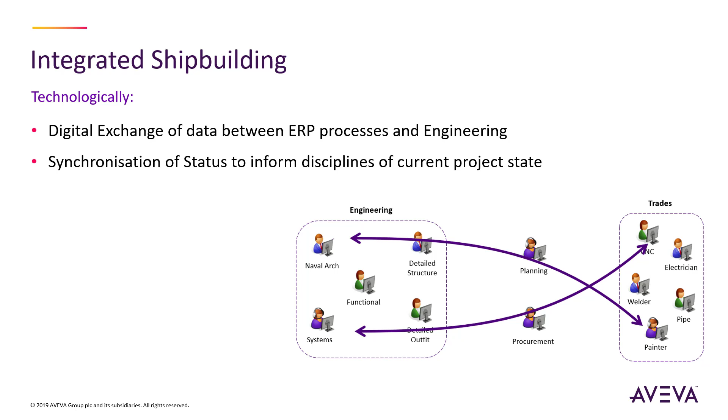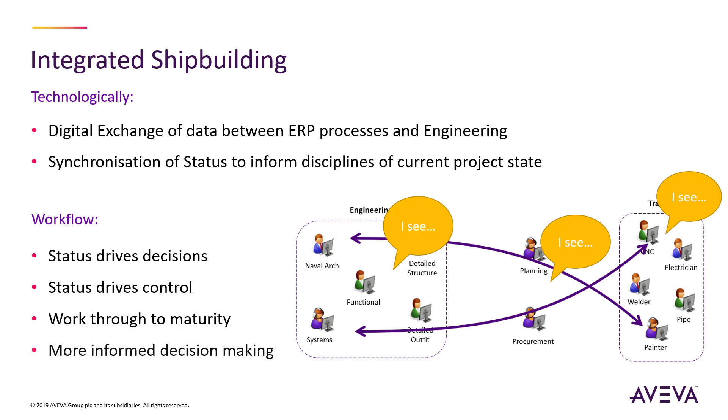As a software solution, integrated shipbuilding supports the process by supporting the digital exchange of project data between the ERP processes and engineering. It synchronizes status information so that different disciplines are informed of the current state of the project. Consequently, status can be used to drive the decision-making process. Status can be used to control the path of the project. This focuses the project to work through towards maturity by the fact that everyone is now more informed in the decision-making process.

Let's now turn to AVEVA ERM to focus on the specific activities this solution supports. AVEVA ERM focuses on all of the traditional ERP activities from project management, planning, production control, management of materials, purchasing, and stores management.

It has four main focuses: catalogue management, where common materials and part specifications are managed; materials management, which procures all that is needed and tracks delivery through to the warehouse; planning organises the activities, collects materials from the warehouse and sets up jobs and processes to track the progress of the project; production allocates and executes jobs, reporting back up to the planning process. When you get into the detail, the solution is quite complex.

I had my first proper introduction to ERM back in 2015, where a team of colleagues were introducing the solution to a shipyard that I was delivering training at. It was a big conference meeting over 5 days.

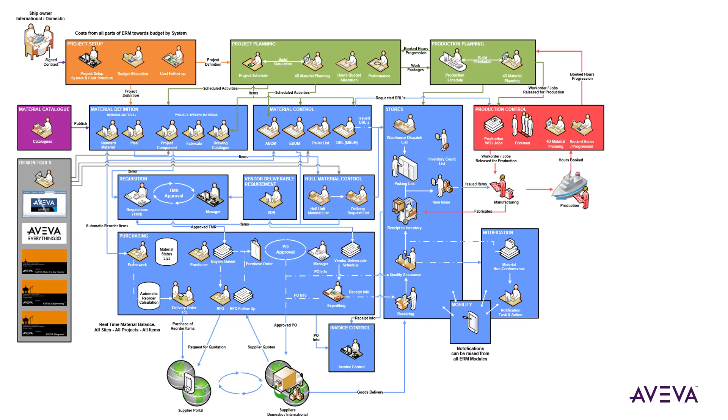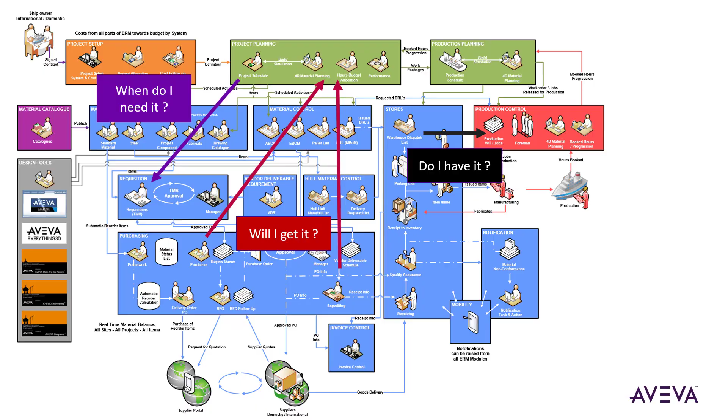There is some deep content here, but when you get down to the individual roles in the process, it's not too complicated. It's all about, when do I need it? When will I get it? Or do I already have it? So rather than spend 5 days, we've distilled the whole process down to 25 minutes. We're going to focus on a typical pipe engineering and fabrication scenario and track it through from design into installation.

We'll start by seeing the engineering process, where the designer will first start preparing the functional design information. With assistance from the software validation process, they'll introduce the information needed for fabrication. Then they'll produce the manufacturing outputs and communicate the bill of materials information through AVEVA ERM to the materials management team.

The material management team will review this information and accept it into the planned activity. Then they'll requisition the material needed to deliver the activity. This will pass the initiative over to Procurement, who will, in our example, prepare an RFQ. This will subsequently be reviewed by a supplier who will return a quote.

Procurement will follow up on this, preparing a purchase order and preparing the delivery tracking information. This entire process will happen digitally. Following this, we'll hand over to detailed planning, who will generate the individual jobs required to execute the activity, requisition materials and parts from the store before issuing the detailed plan.

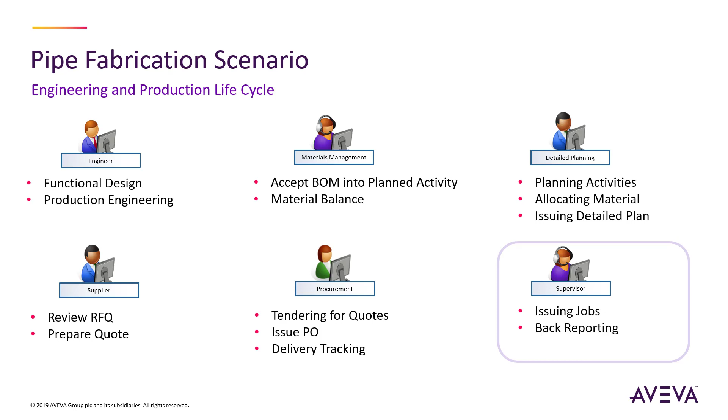Finally, we'll see the role of the supervisor issuing and tracking the individual jobs and how this information is rolled up to the detailed plan and to the project plan.

To note before we begin, the videos together make up 25 minutes of content. The original content my colleagues recorded lasted 45 minutes, so like the Apple adverts, these sequences have been shortened for clarity. But it's worth pointing out the activities you'll see will probably take place over days, weeks and months, so in this respect the shortening is keeping things to the point and interesting.

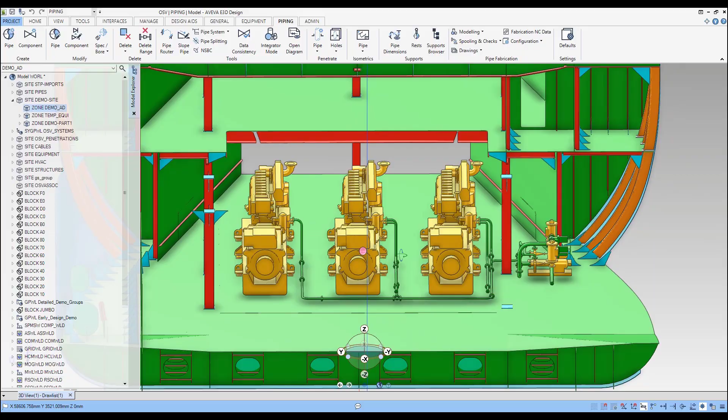So we'll start with the engineer. They'll be designing a pipe, validating the engineering, subsequently producing the production information, and then issuing the bill of materials. Let's begin in the 3D environment, in the engine room. We have displayed here a machinery space with 3 generators and the lube oil system to the right.

We're going to be connecting the system up to the genset on the far left and to the pipe branches already placed for the other gensets in between. We'll start by creating a pipe, naming it, and selecting a specification that will dictate the components and standards we're allowed to use. Then we'll define the intended bore size and some of the operating characteristics.

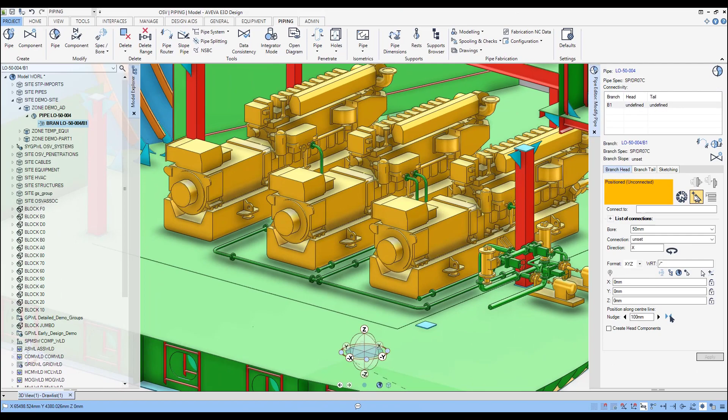Next we'll establish the start and end of the pipe, termed the head and tail. This involves interactively selecting the intelligent nozzles to define an indicative pipe trace presented as a straight, dotted line. We'll be connecting the filter to the far genset.

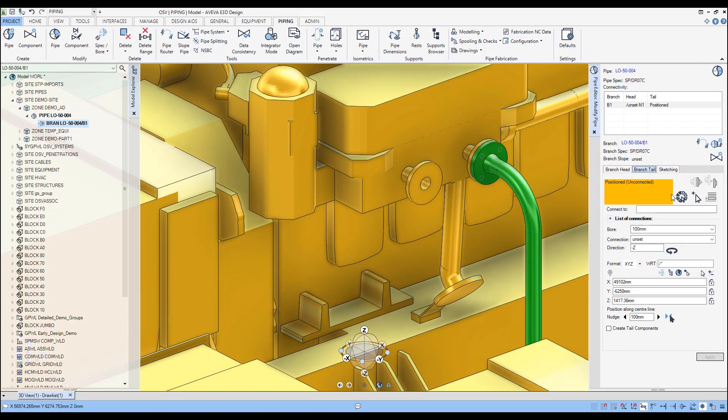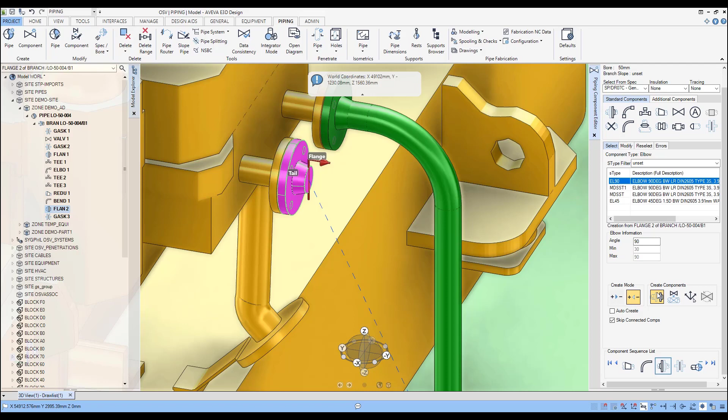Next, using the menu, we'll add and position components. This is one of the many ways of building up a pipe. The position and orientation of pipe components are constrained to behave as a pipe would in the real world, as you'd expect. This simplifies the designer's actions during the preparation of this information.

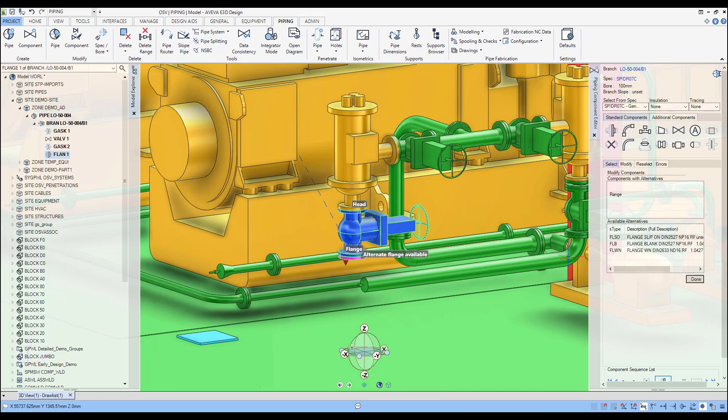Swapping to the other end of the pipe, we'll add a gate valve and place it in a clash-free position with respect to operation and maintenance considerations. The software will ask us to select additional components, in this case the subsequent flange specification required following the valve in the sequence.

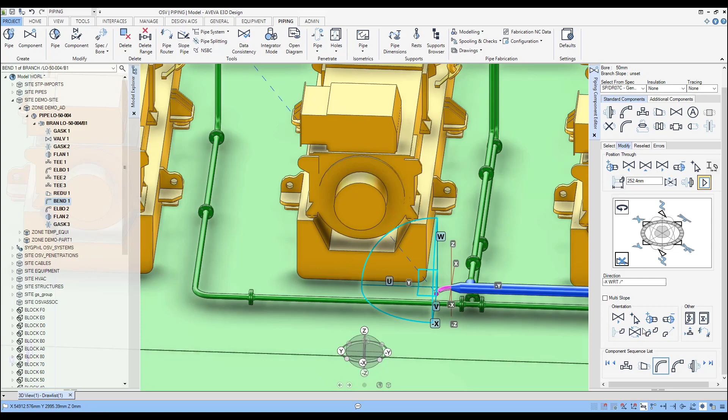We'll now move on to the completion of the pipe to allow us to focus on consistency and fabrication. Using the alignment tools, we'll place the final set of bends and elbows to connect the pipe from head to tail. Note that the designer has never touched the tube itself; it's implied between the piping components, looking after itself.

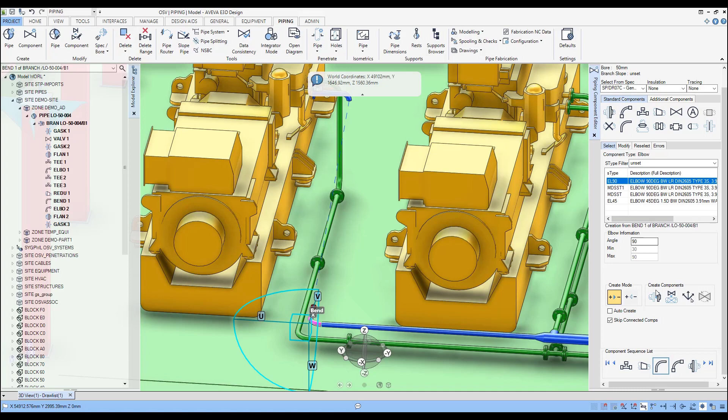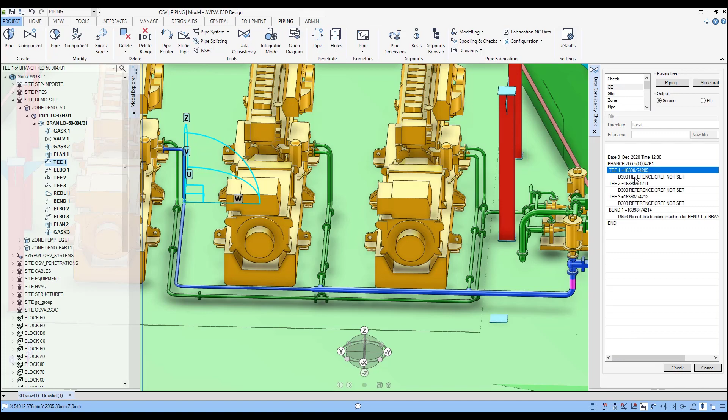With the pipe complete, we'll now run automatic consistency checks to validate if the design conforms to the level of information required to proceed to fabrication. The data consistency check is a first level of maturity after design. The data consistency check in this case reveals 4 violations, 3 incomplete connection references, and a bend that falls outside the capability of the bending machines.

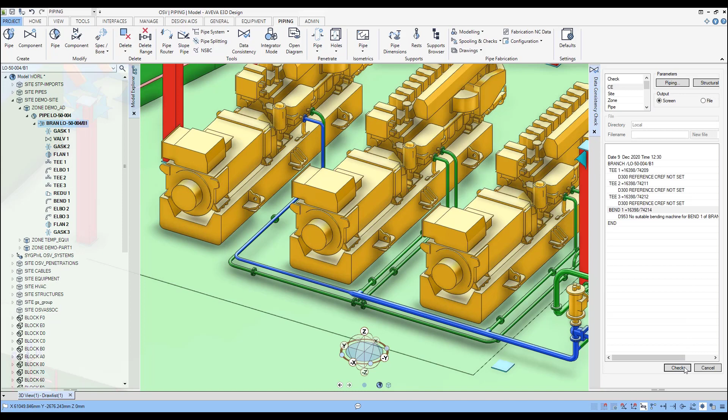The designer will now update the pipe to conform to the standards led by the output of the consistency check. We'll run a final check to confirm an acceptable design. Next, we'll perform a fabrication check. This will confirm that a pipe can be built within the facilities, processes and standards used in our production process.

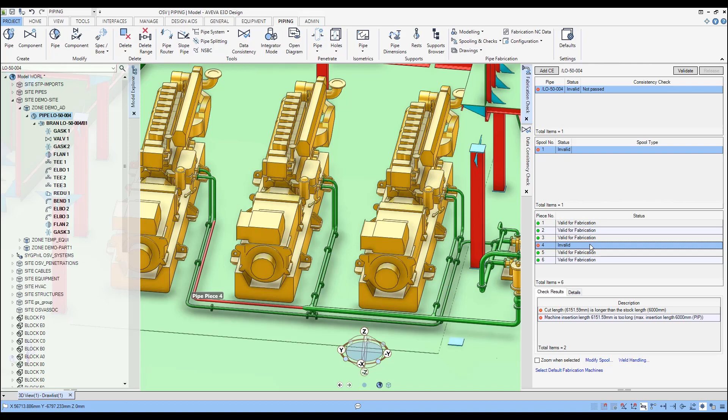Fabrication check highlights an invalid section with 2 violations where the requested tubing is both longer than the stock length and longer than the capability of the bending machine. Since the pipe has yet to be split into spools, this is the next logical step.

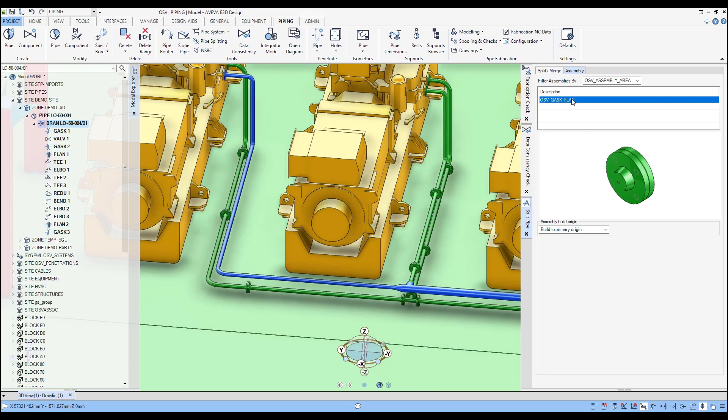The pipe splitting process is automated, determined by a number of rules. In this case, we will specify a minimum and maximum spool length. We will also need to select the specification for the splitting flanges. After selecting the portion of the pipes we want to affect, the additional pipe components required to define the spools are introduced into the sequence.

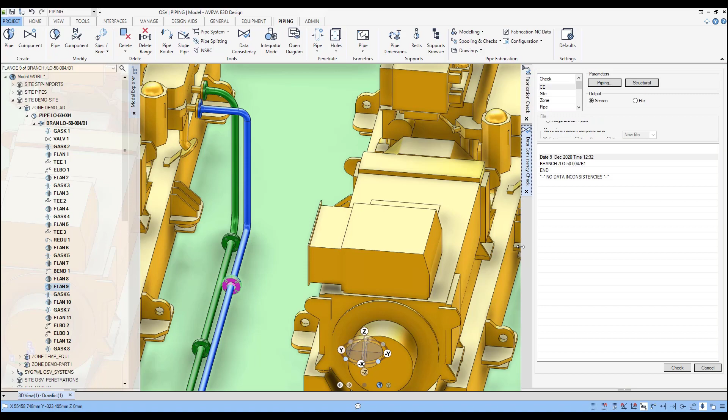The pipe will now pass the fabrication checks, which allows this data to be released for fabrication. This state will allow us to generate the associated drawings. We'll start with the individual spool sketches.

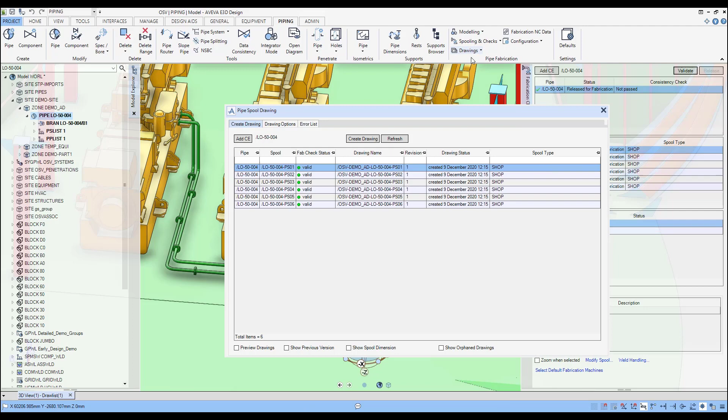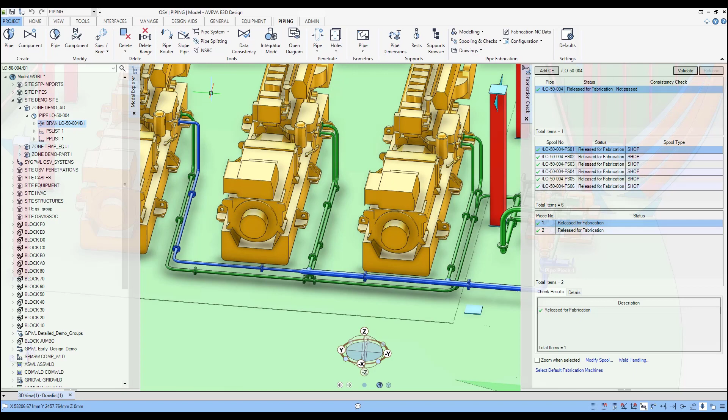Next, we'll generate the overall piping isometric. You'll note that the isometric contains parts and bolting lists retrieved from the catalogue. The designer never directly specifies this information, and this demonstrates yard standards being brought through into the production outputs with automatic consistency.

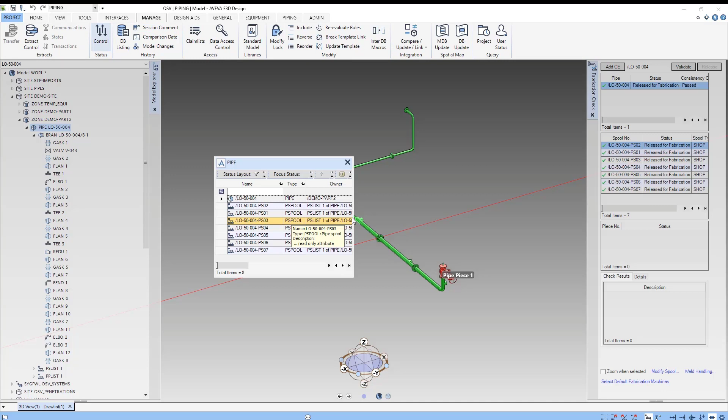At this stage, we've completed the engineering tasks and will hand over leadership to the planning, procurement and material management in ERM. To communicate these intentions, we'll raise the status on the pipe, which will mark it to allow us to publish the part list information to planning and procurement. This process may also introduce a lock on the pipe to prevent unauthorized modifications until the required change management workflow steps have been followed, but only if this is a desired implication of your maturity management strategy.

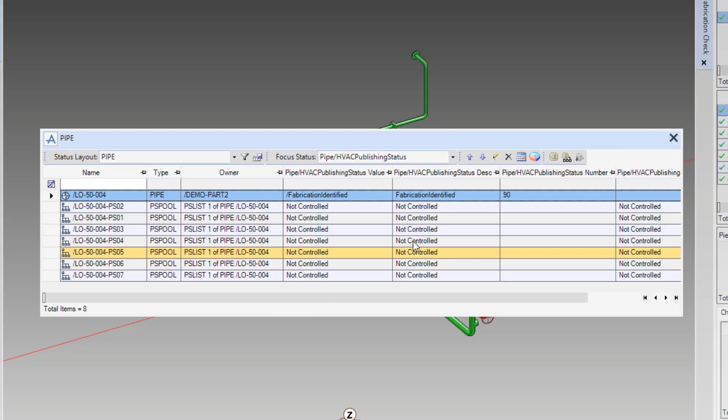Next, we'll publish the information that has changed state to ERM as we hand over to that stage of the process. No need to create paperwork, leave your chair, or even have a conversation.

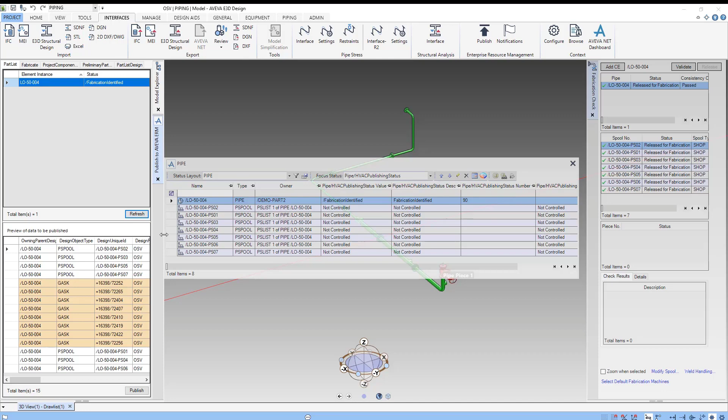So we saw the engineer designing the pipe. He followed up by validating the design using the data consistency and the fabrication checks. Once complete, he issued the manufacturing information in terms of the spool sketches and the isometrics. Following that, they issued the bill of material.

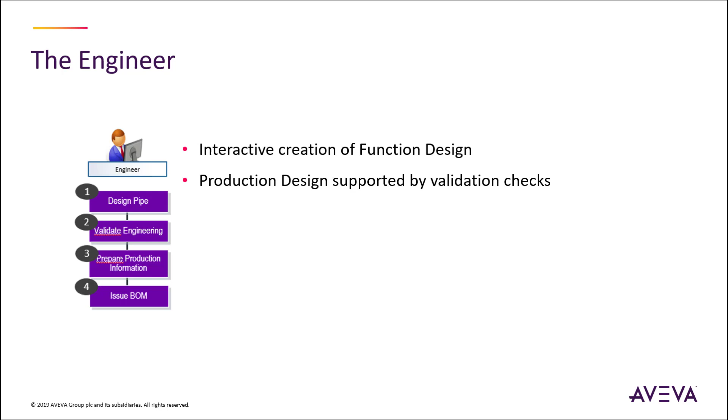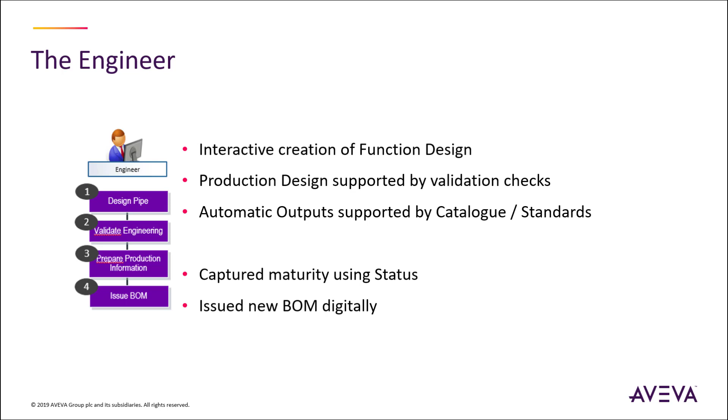One should note the interactive creation of the functional design content, how production design was supported by validation checks, and the automatic outputs supported by catalogue and standard information. We were able to capture maturity using status, and we issued the new bill of materials digitally.

We'll now move on to the project planning process. In handing over the bill of materials, the project planner will review the activity with respect to that information. They'll update the project plan, review the material balance, and request any material that's needed.

Now in ERM we can see we've received a part list, and this is allocated to an activity, Pipe 004 403 0101, which we'll shortly see in the project plan. In this state, the received part list is pending review and release into the plan. The part list contains all the items just issued by engineering.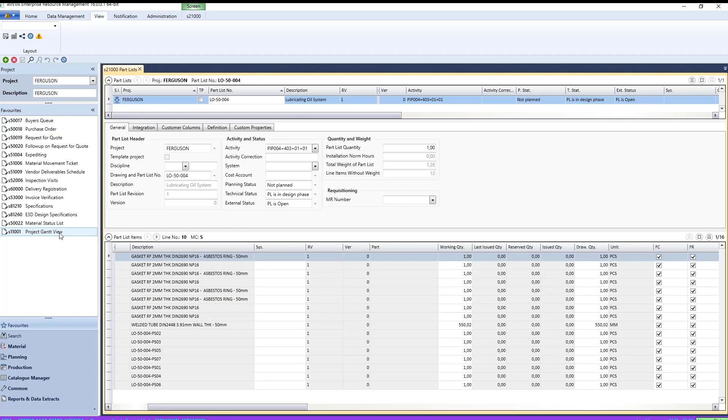These items will automatically inherit dates when they are required by virtue of their association with the activity.

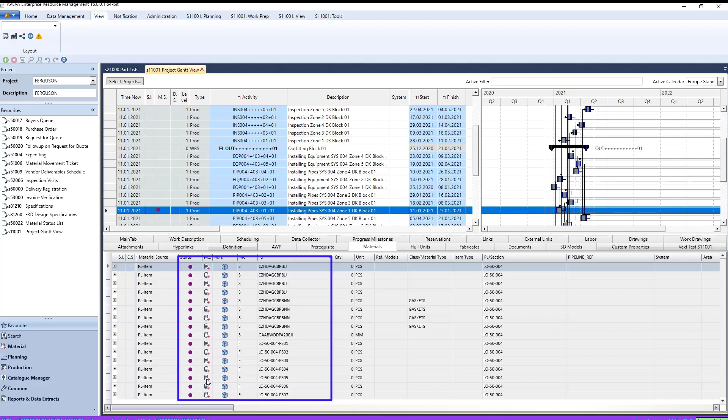In the project view, a Gantt chart will scroll through to the activity, and you'll note it's highlighted by a black dot in the material state column. Action is required. Selecting the activity, a black material status against each part in the material list indicates it's unavailable. Having checked the parts list, we'll now issue it into the planning process.

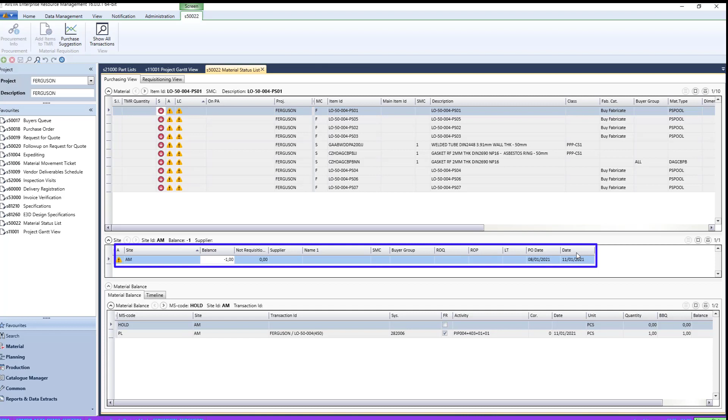Now taking a look at the material balance, we see here a selection of red arrows, indicating that there's no stock of any of the items in the parts list. The graphical timeline of material balance, which indicates inventory and utilization of resources in the project, is negative.

To address this, we'll turn this demand into a technical material request, a TMR, and issue it to Procurement to obtain the materials we need. The TMR is generated directly from the stock request. In addition, we can attach the associated engineering documents seen previously to support the business process as we go out to third-party suppliers.

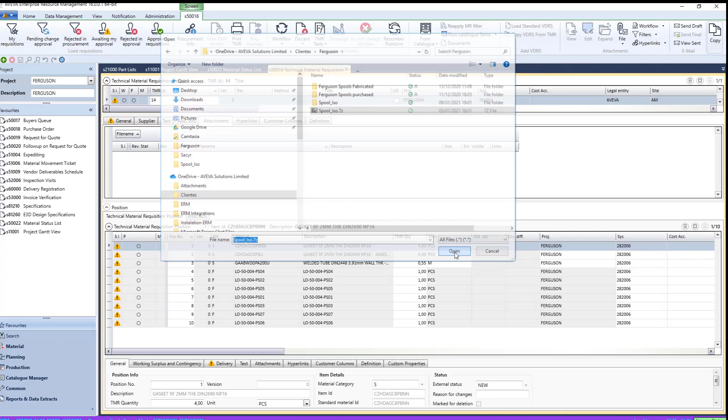Documents can be attached as a pack, zipped, or individually.

We'll give the TMR an identifying title, check and review the header, then issue for approval.

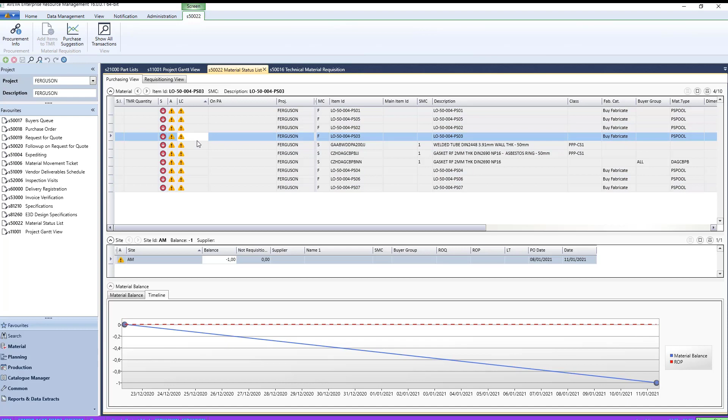So we saw there the role of the project planner once they received the bill of material information. They reviewed it, updated the project plan, and for any material that was outstanding, reviewed the material balance and issued a request for additional material.

It's interesting to note that these spools have been received as fabricates. We'll be issuing them to a third-party supplier. An alternative is that we could be generating these spools from fabrication using standard material. It's a very similar process that works in parallel to what we've been showing.

We'll now be looking at the procurement process. Based on the material request we just issued, Procurement will issue an RFQ, and they'll issue it into the Supplier Portal. The supplier then has the opportunity to review the RFQ and prepare a quote accordingly.

Back in Procurement, they can review the quotes, select which one they want to move forward with, issue a purchase order, and prepare the delivery receipt for any parts and materials coming into our warehouse.

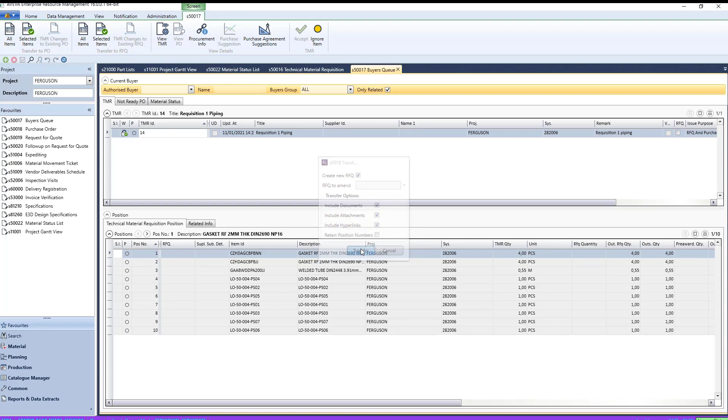The initiative now falls on Procurement to acquire the parts we've just requested. They'll find the TMR in an effective inbox, the buyer queue. We'll turn the TMR into an RFQ, which in this case we'll publish to the Supplier Portal.

All of the requirement dates are carried through based on the activity the parts were associated with. We can set the relevant dates over which the request is valid and any other characteristics.

Here we are selecting the suppliers we'd like to quote on this RFQ.

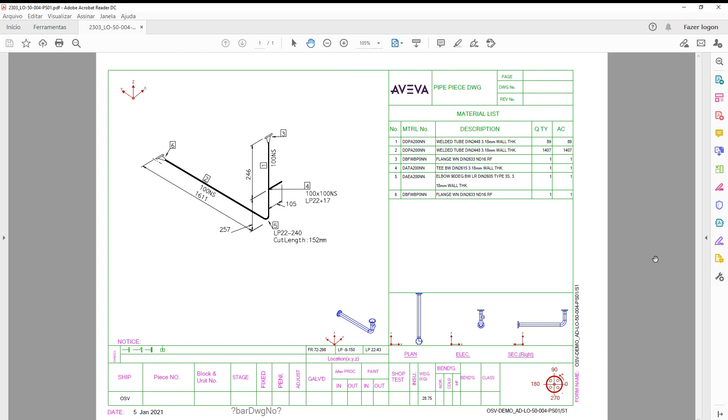Attachments added to the TMR are automatically carried through into the RFQ. Submitting the RFQ highlights the chain of approval. This workflow can be tailored for each organisation, with separate individuals holding responsibility to fully issue, for example, RFQs and purchase orders. You'll see that process happening several times in this session.

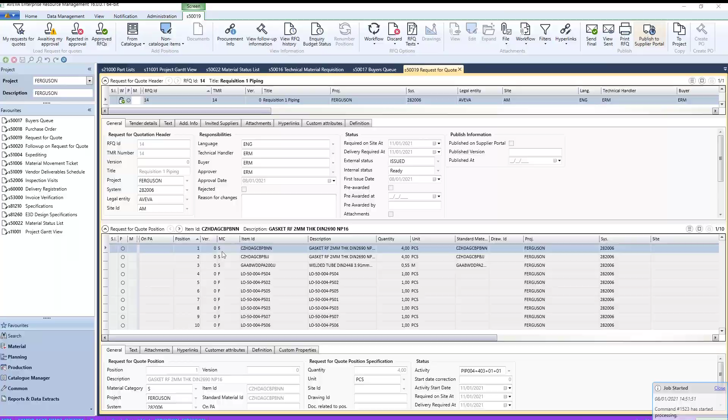Now we turn to an external view of this data. The Supplier Portal is where third parties can electronically respond to your RFQs, managing all the information exchanged in one place within a qualified workflow. The RFQ dashboard shows the state of all the RFQs, and we can see that we have one available to process. Going into it, we see a mirror of the information we prepared in the RFQ and can view the documents attached in the previous step.

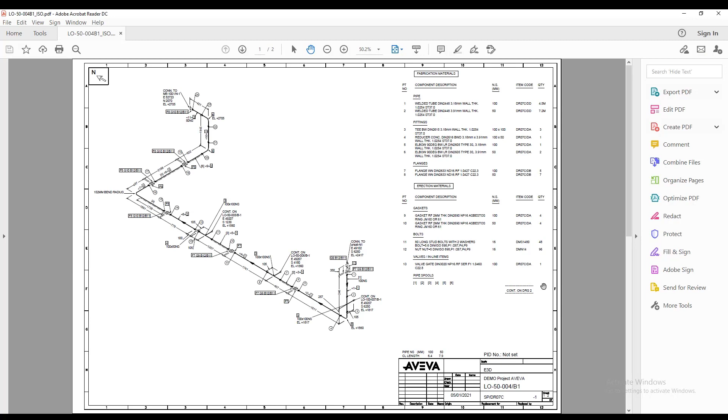To complete the document, mandatory fields are highlighted. Relevant business terms can be set, or the form can respect previously agreed framework agreements.

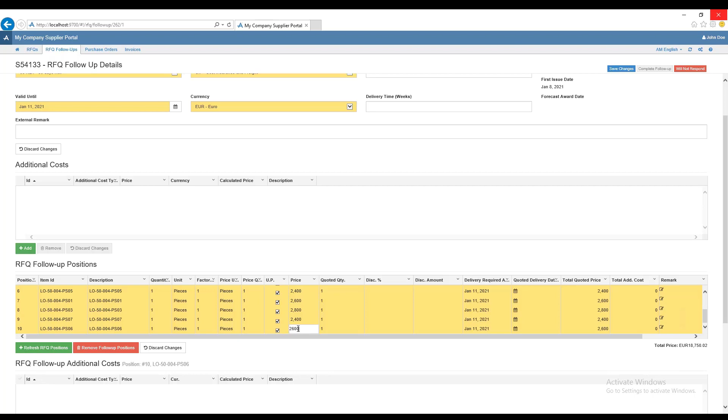In this case, we'll manually set the quantity and price of the parts requested. The supplier can also attach any digital document that is relevant to the quote or to parts of interest.

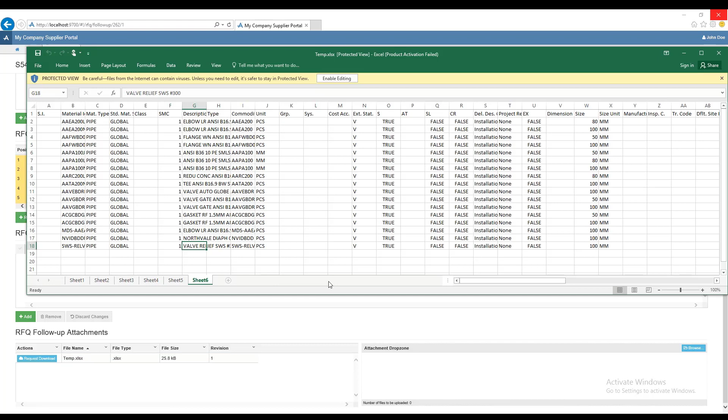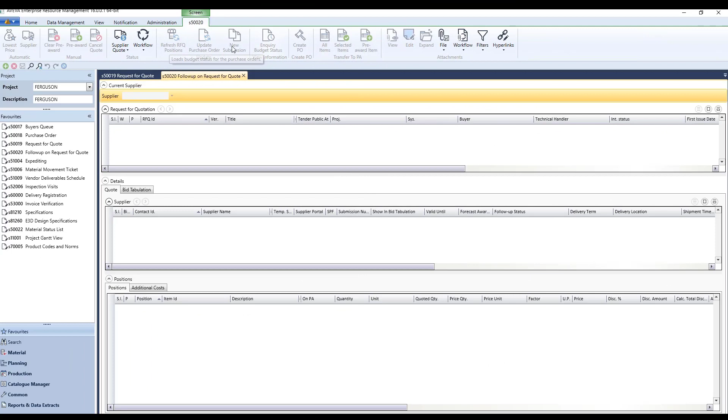The supplier will now finalise the form and mark it as complete. Exiting the form, the status will then be reflected in the RFQ dashboard. Back in the procurement department, we'll receive the follow-up and all of the information submitted by the supplier, terms, prices and dates.

If multiple suppliers have been selected, their submitted information can be compared between each other. We also have access to any documents the suppliers may have attached.

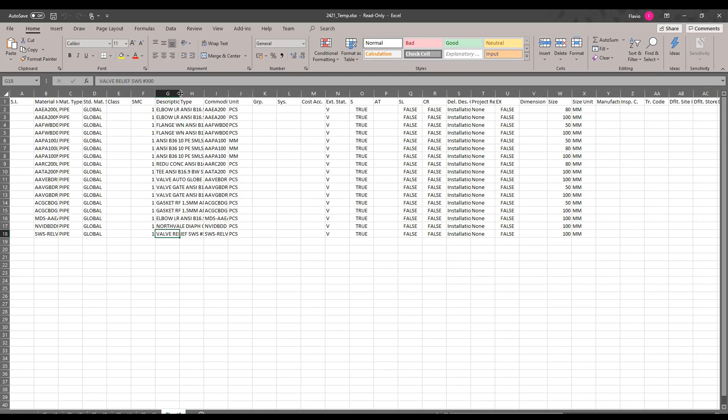To assist supplier selection, there are facilities to highlight the RFQ with the lowest price and expose any information supplied that does not meet the expectations of the original request, in this case quantities not being met.

To proceed, we'll generate a purchase order from the selected RFQ. The purchase order already contains the information from the RFQ and will add information such as the relevant account classifications.

You'll note that as we've been going through these processes, mandatory information has been highlighted in yellow to assist the user correctly complete forms that are often quite visually busy. The purchase order is issued into an approval process where subsequent roles can confirm if it can proceed through to action.

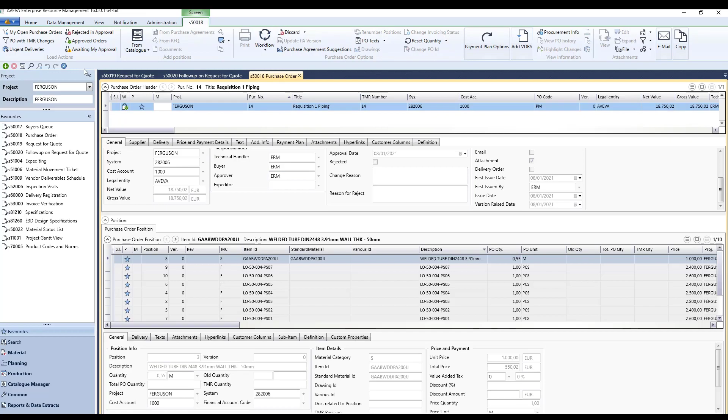At this stage, the role of procurement is mostly done. We now need to raise information to notify and capture deliveries as suppliers complete their side of their purchase orders. Delivery registration will capture individual consignments if separate, allow for review and acceptance of delivered items as part of a quality control process, and capture where in storage these items will be held until needed.

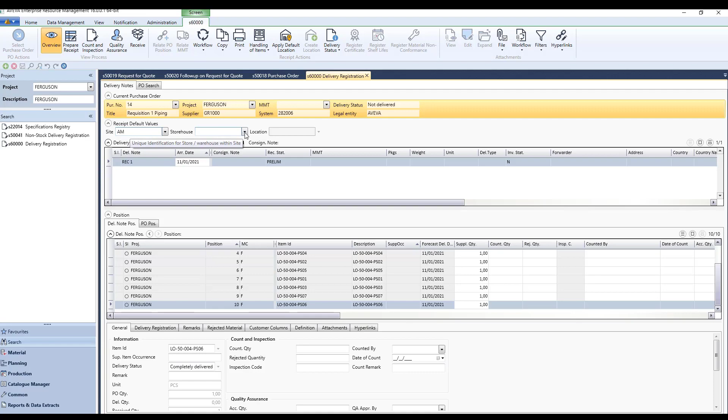Completion of the delivery registration will capture what has actually been delivered compared to what was requested, and update the actual material balance feeding into the planning process.

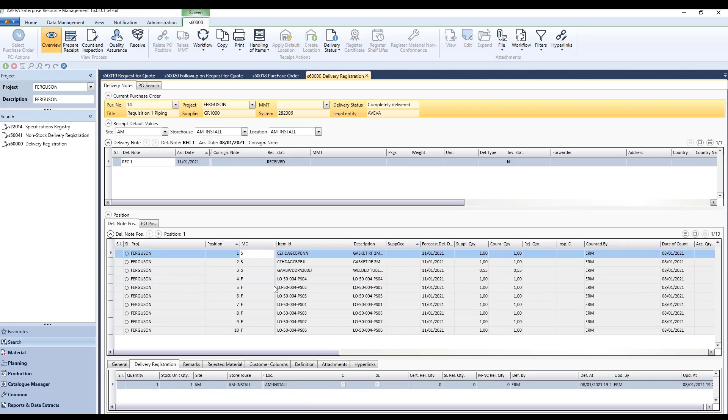Let's return for a moment to the planning process. The material status on this activity will now show green. We're good to go ahead and prepare the detailed plan for this activity.

So there we saw the procurement process. The procurement team issued RFQs that were processed in the Supplier Portal. Subsequently, they reviewed quotes, issued a purchase order, and prepared the delivery receipts. We note that this was a fully tracked, digitised activity including the exchange of documents.

In this case, we've gone out to a third-party supplier to deliver the spools as effectively parts. But we could have done this through an internal manufacturing process, and the equivalent sort of procurement processes, in terms of buying standard materials, would be what we would have seen in this case.

We'll now move on to detailed planning. In preparing the planning activity, the detailed planner is going to be allocating the parts list to the range of jobs that will generate throughout this process. We'll then have to requisition material from the store to tag those parts with the activity and mark them as being used.

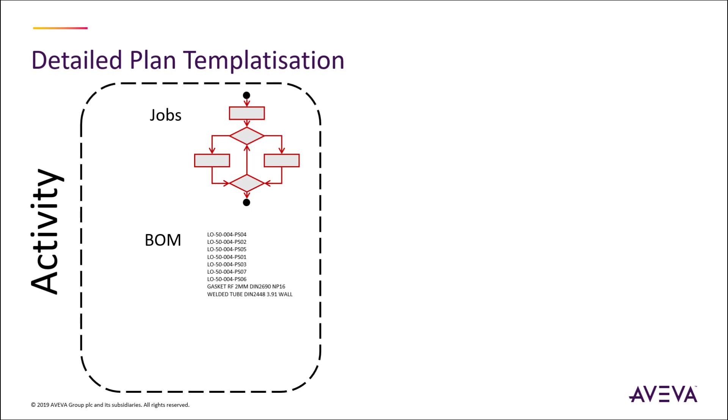The detailed planning process takes advantage of a templatization process. This is where a generic set of jobs that are targeted at an activity are combined with a bill of materials and parameters by the norms and complexity to generate an outline plan for each range of tasks that we need for fabrication. The outline plan can then be updated with the specifics based on the planner's detailed knowledge of how things should be progressed.

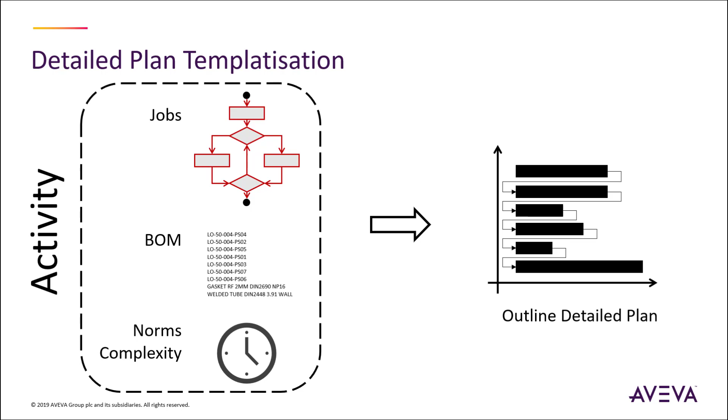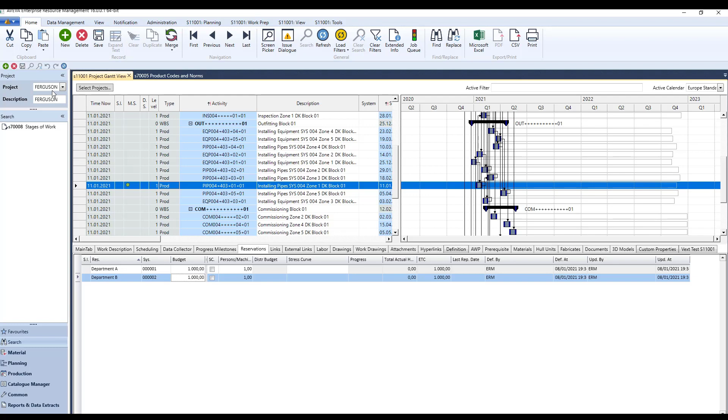The detailed plan first needs to be aware of the resources that will be used in the activity. Here we are finalising the assignment of 2 departments to the activity with their respective budgets. Following this, we can generate the detailed plan.

The initial detail plan contains each task and its duration, but it is not yet sequenced. It also doesn't have any material.

Updating the material status, we can see the sequence of black dots just like we saw with the initial part lists when imported. These indicate that we have yet to assign any material to the task.

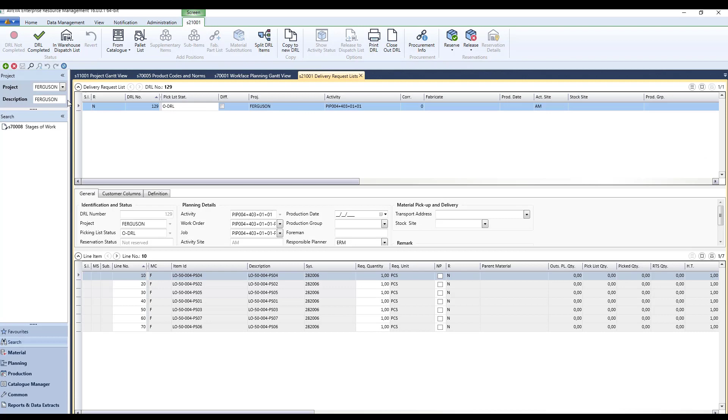Also indicated are two delivery requests, DRLs, which prompt collection of any required material and parts from the store, allocating it to these tasks. Completing the DRL confirms this request.

It could be used to prompt a picking activity in the warehouse depending on the degree of automation required. Once completed, the status indicates that material is now confirmed as allocated to this activity. Moving on, digging into the task, we can see that individual parts in the activity are confirmed as available.

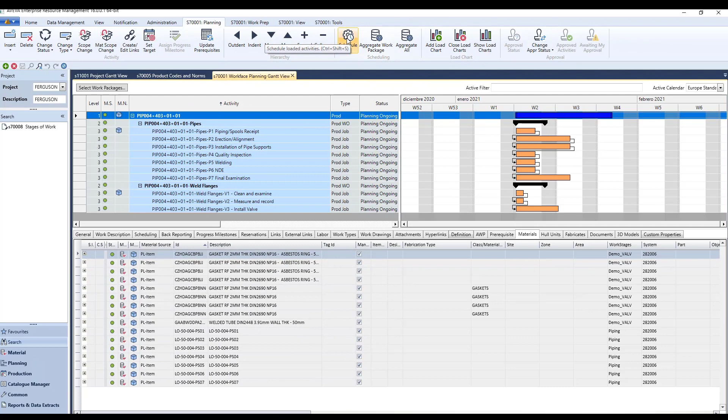Next, we'll schedule the plan which will sequence it with respect to the prerequisites. The details of the schedule may be manually adjusted and regenerated again if necessary.

Finally, we may of course include any manufacturing information associated with the activity, and we'll attach the isometrics in this case which you saw generated earlier.

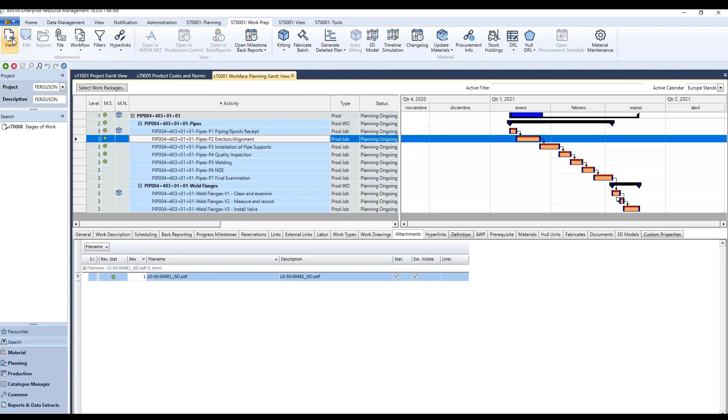Detailed planning is now complete, and we'll roll up and release each section of the plan in turn, starting with the activity in the project view and then with the detailed plan.

So we saw there the detailed planner planning the activity using a templatization process, allocating parts to the activity to the respective jobs, and setting up the requisition process to extract the parts needed from the stores.

We note the use of templatization to turn an activity into a range of individual jobs. The number of jobs and the time that they take is parameterized by the use of norms and production performance statistics.

Next, we'll look at the role of the supervisor. The supervisor is going to be allocating jobs to specific resources, and as the job progresses, we'll be capturing back reporting information. That information will be progressed onto the detailed plan and subsequently can be visualized in the overall project planner.

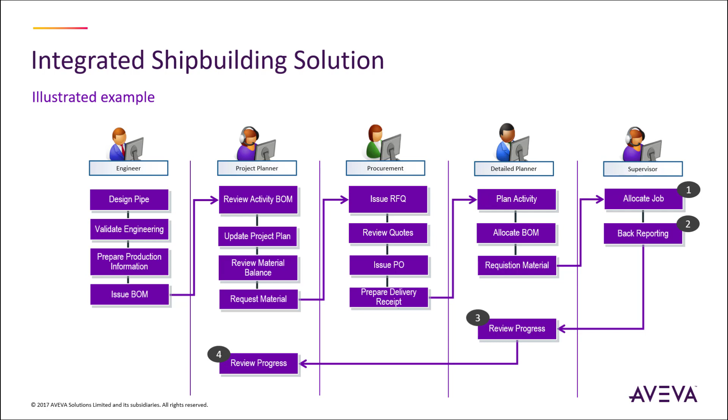Now that the detailed plan has been released, we'll create the individual jobs and capture progression through a back reporting process. Here we are defining the first job in the activity's detailed plan to pick up the required parts from storage.

Required paperwork can be automatically generated stating the details of the job and any parts required. Barcoding can be used to feed into a digital tracking process.

Now that the job has been started, we can collect information on progress. Reporting back will capture hours spent and the degree of progress made.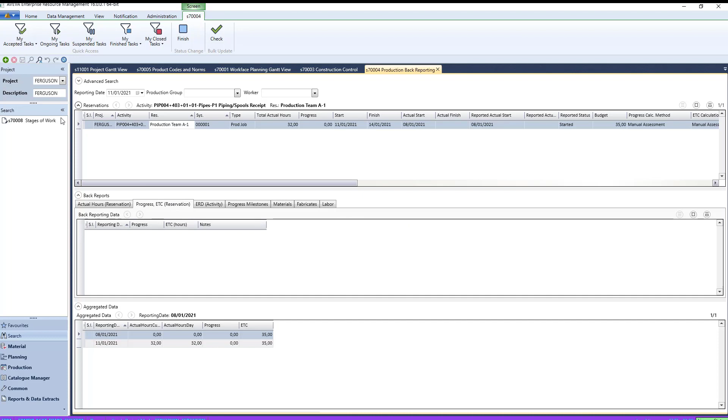The job is now completed, and the record itself will capture start and finish dates as well as the actual time used to complete the task.

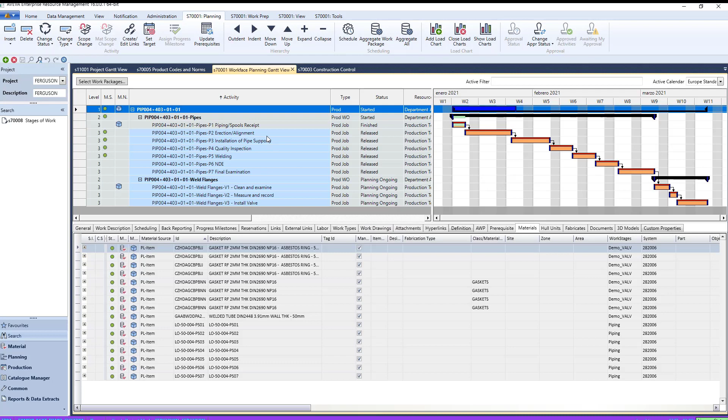This information will roll up into the detailed planning information, and on to the project level plan.

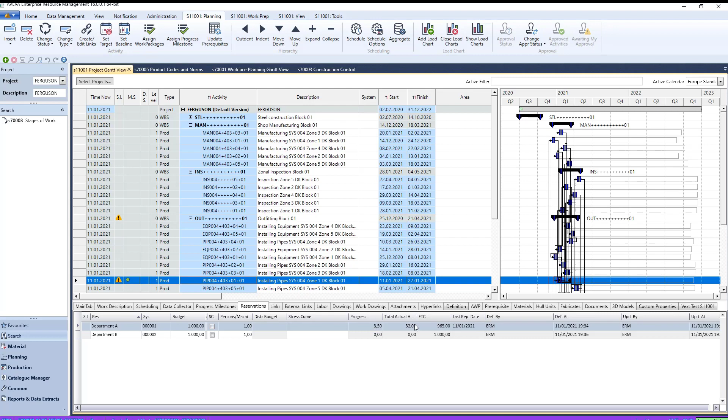So there we saw the role of the supervisor. They allocated the job to resources, and as the job progressed, captured information to report back into the overall planning process. We note the seamless integration of this information into the project process and plan, and the way that automatic deliverables like job cards were generated from the system.

We also note that there's opportunity to bring mobility into the working environment.

So drawing the presentation to a close, we've seen how integrated shipbuilding supports the engineering, planning, procurement and fabrication disciplines in the preparation of information required for production, by providing both a tailored means of communicating information and tracking maturity. These two factors provide a baseline to understand progress and allow each discipline to identify and address inconsistencies.

Subsequently, we introduced AVEVA ERM, which delivers materials management, planning and procurement capability. Since this solution provides so much capability that only really the experts in these fields will want to dig deeper, we used a pipe fabrication scenario to tell the high-level story of the information journey from engineering through to the workforce.